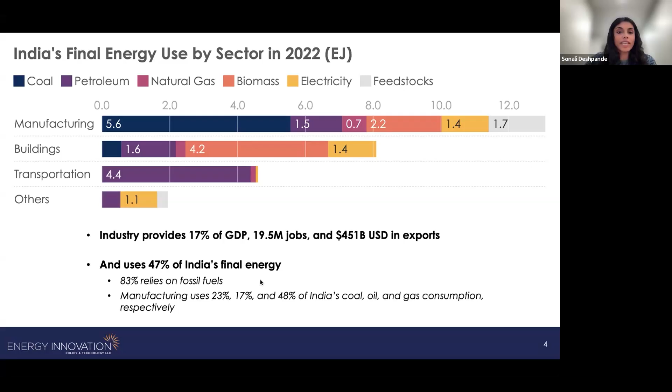The challenge is that fossil fuels don't just emit greenhouse gases, but also local air pollution. And in fact, Indian industry is responsible for more particulate matter and nitrogen oxide emissions than India's entire transportation sector, which is massive.

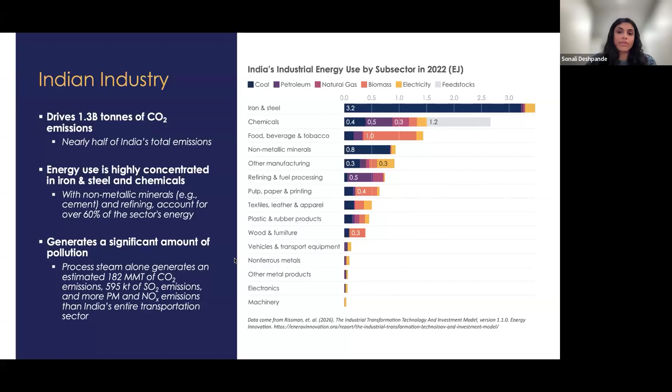So lowering those emissions requires understanding where they come from. Most are from fossil fuels burned for heat and mechanical energy, as you can see in this blue box on the left. Industry also uses fossil fuels as feedstocks, which release CO2 when they're chemically transformed into products or when those products are used or discarded. And then there are also indirect emissions from industry's use of purchased electricity and heat produced offsite using fossil fuels.

So these different emission sources need different solutions. For fossil fuels burned for energy, those processes can be electrified, which is emissions free if it's powered by renewable electricity.

Fossil feedstocks can be replaced with clean feedstocks made from clean hydrogen, sustainable biomass, or recycled materials, and purchased electricity and heat can be replaced by clean electricity.

But since these strategies can be expensive and resource intensive, the highest priority is to first reduce industrial energy demand through energy efficiency, material efficiency, and circular economy strategies. Carbon capture and storage is another industrial decarbonization solution that has a role, but it should be reserved for just a very few specific use cases. Largely, electrification is the solution for industrial emissions.

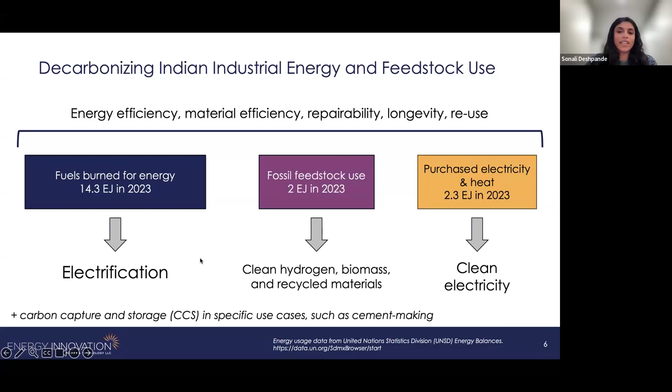So why is industrial decarbonization important for India at all? We touched on this a bit earlier. Indian industry can't keep relying on imported fuels. Those fossil fuels are already very expensive in typical times, and global supply chain issues can send their prices soaring, like we've seen in the last few months with the closure of the Strait of Hormuz during the Iran war.

But industry can't keep relying on coal either, especially in urban industrial zones that are feeding a severe air pollution-driven public health crisis. And importantly, India's reliance on fossil fuels is not compatible with the goal to reach net zero emissions by 2070, especially as industry is rapidly growing to meet the demands of industrialization.

But fortunately, the perfect solution is available to Indian industry: cheap, clean solar power. India has some of the lowest solar prices in the world, with recent auctions clearing at 2.5 rupees per kilowatt hour for standalone solar and 3.6 rupees per kilowatt hour for solar plus battery storage.

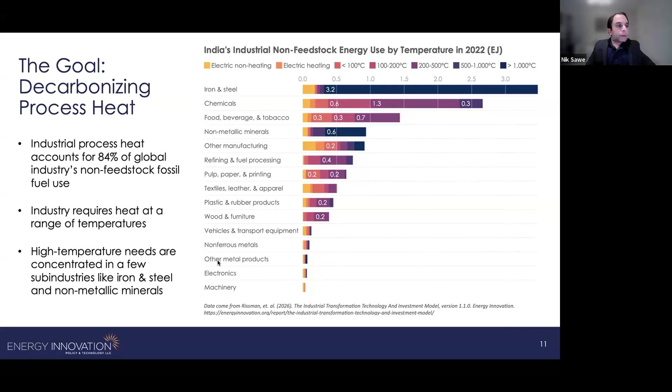Fortunately, we have electric technologies currently that can provide heat across all the temperatures that we use in industry, whether that's induction heating or electric arc furnaces, or as we're going to be hearing a lot more about today, industrial heat pumps at temperatures under 200 Celsius, and then thermal batteries as well that provide storage capacity.

The price proposition for India is also very suitable right now. On-site solar, whether that's paired with storage or not, as well as captive solar, are cheaper than oil and natural gas. And grid electricity as well could be cheaper currently. It has cross subsidies where industrial customers are supporting agricultural and residential customers, but that price would come down considerably if this was not the case.

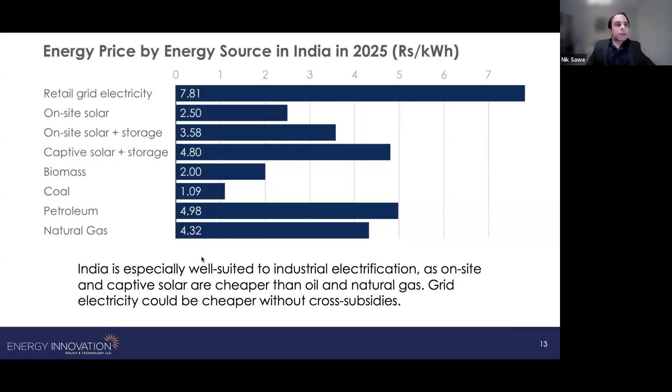We also have to keep in mind, as we're comparing across different energy sources, that fossil fuel efficiency really is not up to snuff compared to electricity and declines with increasing temperature. So energy is lost in exhaust gas as sensible and latent heat. And at high temperatures, this can lead to as little as 21% efficiency. Now, waste heat recovery can reduce that heat loss by one-third to two-thirds, but electrified heating circumvents that entirely as it doesn't produce combustion exhaust gas, avoiding these energy losses and dramatically improving the cost proposition of electrification versus fossil fuels at high temperatures.

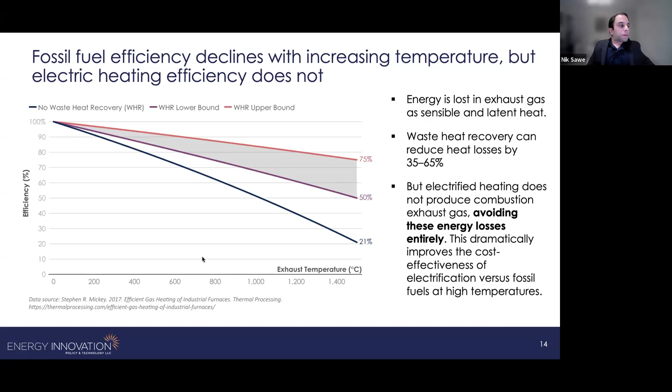So we're going to break down our techno-economic analysis in a moment. What we looked at when modeling different industrial heating configurations included heat pumps and electric resistance boilers and furnaces using 3 different electricity sources: on-site solar and battery storage, captive solar and battery storage, grid electricity, and thermal batteries using on-site solar. These were compared to biomass, coal, petroleum, and natural gas-fired boilers and furnaces.

We broke them down across all the temperature ranges we just saw. We did a levelized cost of heat calculation that included energy costs and capital costs amortized over 26 years with an 11% discount rate, as well as carbon costs of $10 US per ton of CO2 emissions. We adjusted for equipment efficiency as well.

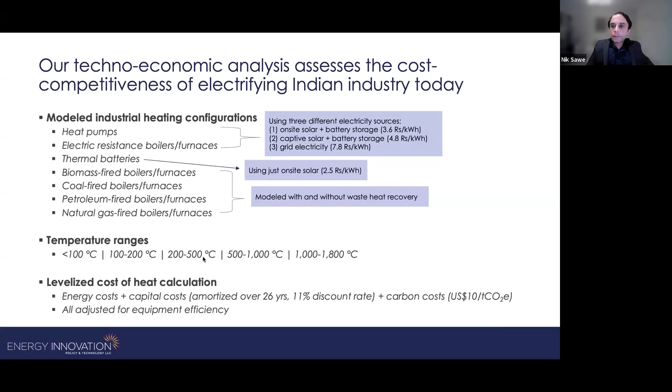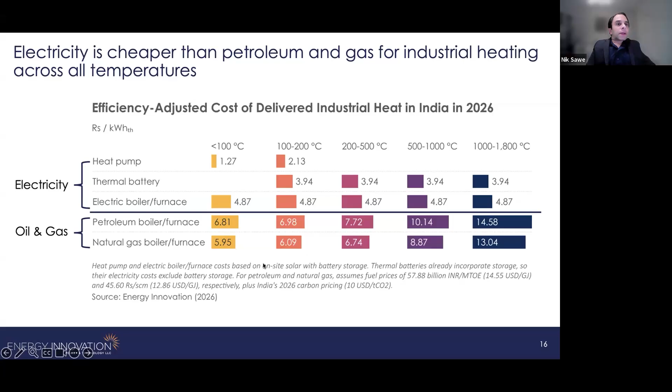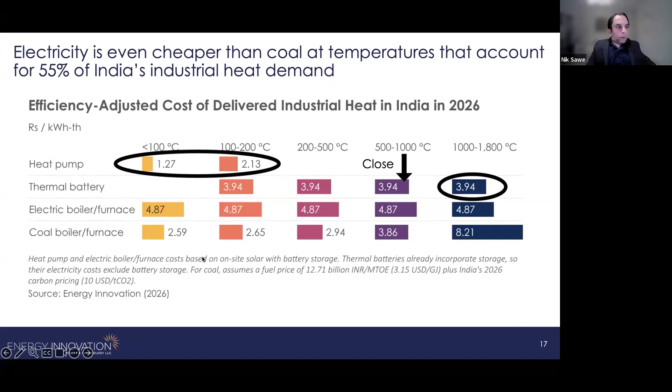We are also very close to cost parity using thermal batteries at 500 Celsius onwards. So really it's that medium temperature, 200 to 500 Celsius window, where coal is still outperforming the electricity options.

That efficiency gain over coal is really at the low end, driven by the unparalleled efficiency of electric heat pumps. They can deliver 3 to 4 times as much heat as the electricity they consume for temperature increases of 30 to 80 Celsius, and they're still the most efficient technology out there when delivering larger temperature increases like 150 Celsius.

At these higher temperatures, fossil fuel efficiency plummets, as we just saw, even with waste heat recovery. In those cases, electric furnaces and thermal batteries still maintain 95+% efficiency and really stand out by comparison.

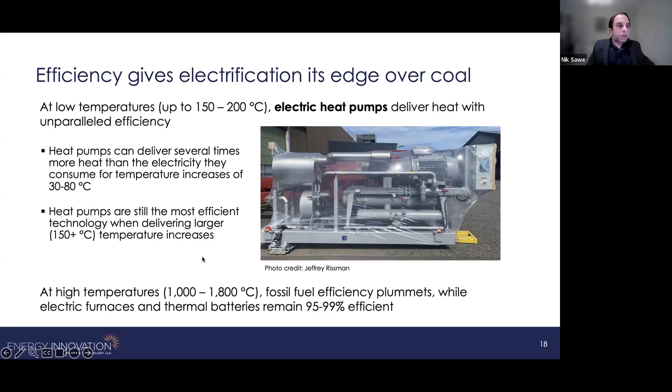Next slide. In India, there have already been pilots of industrial heat pumps up to 140 Celsius. Current models cap out roughly around that. Some models go up to 165 that are a bit harder to get, and newer models coming out support temperatures up to 200 Celsius.

In India, heat pumps have been piloted in places like chocolate and sugar plants, as well as a Gujarat chemical manufacturing plant, where one cut energy usage by 38% and achieved ROI in 18 months.

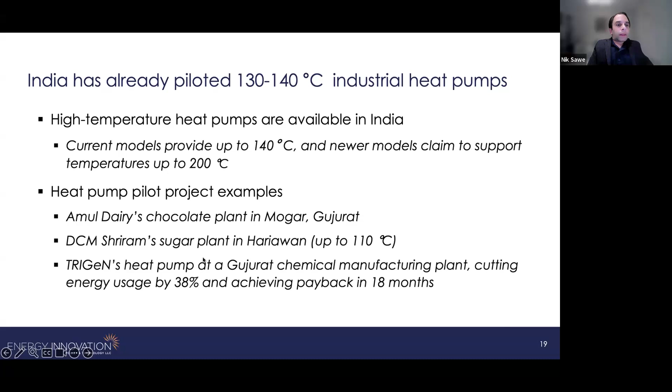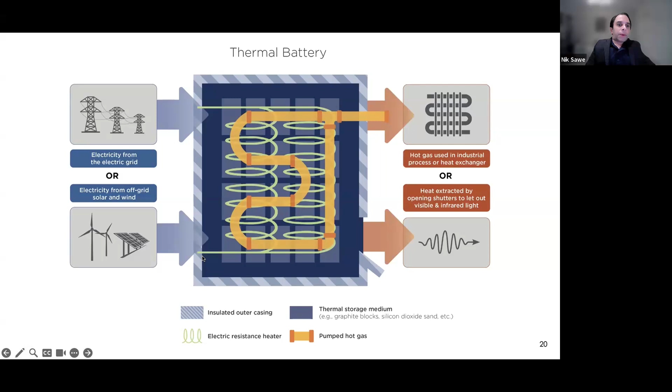Next slide. For those mid and high temperature ranges, thermal batteries essentially work by taking electricity from the grid or from off-grid solar and wind, then running it through an electric resistance heater in a thermal storage medium. Often this is a very inexpensive medium like graphite blocks or bricks. The hot gas is then used in an industrial process or heat exchanger. Less commonly, heat can also be extracted by opening shutters to let out visible and infrared light.

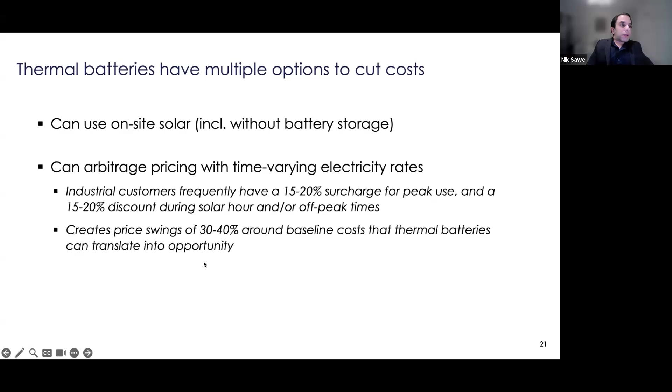Next slide. Thermal batteries have a couple of options to cut costs. They can use on-site solar, including without battery storage, and they can also arbitrage pricing with time-varying electricity rates. Industrial customers in India frequently have a 15 to 20% surcharge for peak use and a 15 to 20% discount during solar hour or off-peak times. So in Uttar Pradesh that's plus minus 15%, and in Delhi that's plus minus 20%. You end up with large price swings around the baseline cost that thermal batteries can translate into an opportunity.

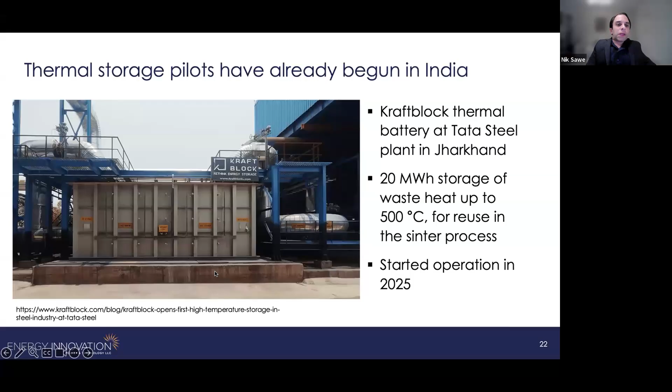Next slide. Thermal storage pilots have already been performed in India at a Tata Steel plant in Jharkhand using Kraftblock's thermal battery—20 megawatt hours of storage for waste heat up to 500 Celsius, reused in the sinter process. That just started operation last year.

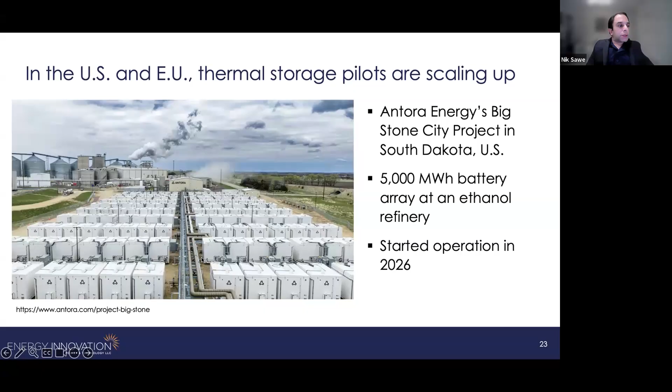Next slide. In the US and EU, they're starting to scale thermal storage pilots. One big example is Antora Energy's project in South Dakota, using a 5,000 megawatt hour battery array at an ethanol refinery, which just started operation this year, 2026.

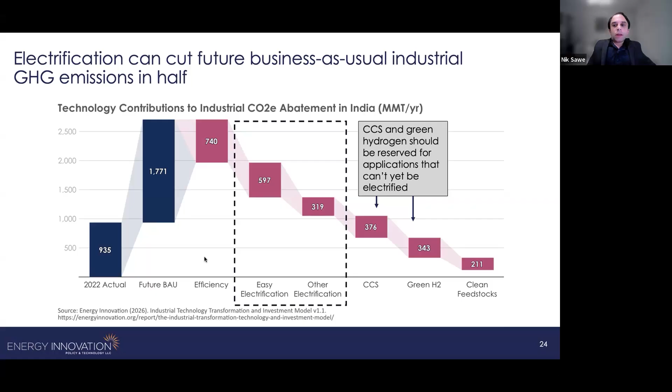And then for CCS, using that for very difficult to abate non-energy CO2, for example, from cement making and certain chemical transformations, as well as bioenergy CO2 from truly low carbon sources, and addressing 90% or more purity CO2 streams from ammonia production, ethanol fermentation, those kinds of applications, as well as the production of blue hydrogen from refinery byproducts or to displace gray hydrogen. Okay, next slide.

And not just CO2 emissions are abated, but electrification really slashes conventional pollutants as well. So renewable-backed technologies, electric technologies really don't produce any conventional air pollution.

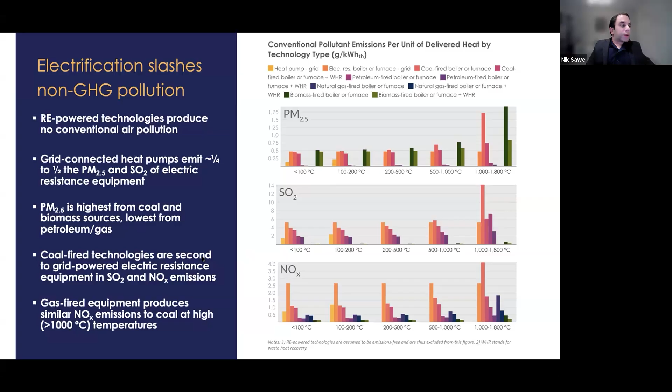But you can see on the right that we're comparing when we say something like heat pump with the grid. These are emissions from that heat pumping plugged into grid with the present day distribution of resources, energy sources. And so even then, grid-connected heat pumps emit a quarter to half of the particulate matter and SO2 of electric resistance equipment. Particulate matter is highest from coal and biomass sources, and then lowest from petroleum and gas. Coal-fired technologies are second to grid-powered electric resistance equipment in sulfur dioxide and NOx emissions. But gas-fired equipment also produces similar NOx emissions to coal at high temperatures, so over 1,000 Celsius.

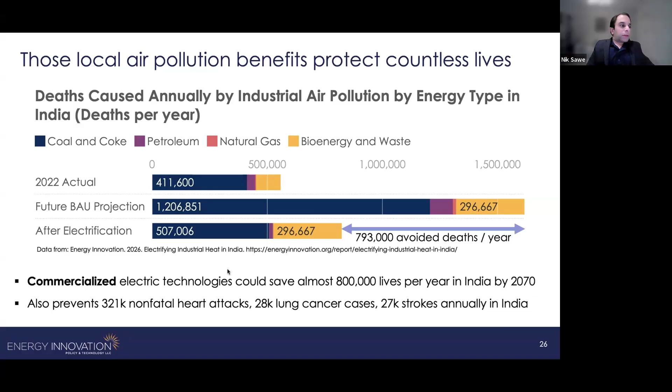Those air pollution benefits that we can get from direct electrification can have a big impact on lives saved. So could be almost 800,000 lives per year in India when we're doing business as usual forecasts rolled out to 2070. Also prevents a number of non-lethal health impacts like heart attacks, lung cancer cases, and strokes. And so really great benefit to the quality of life of everyone around them.

And I'm going to hand it back to Sonali now to talk about policies that we can use to help fuel industrial electrification. Yeah, thanks, Nik.

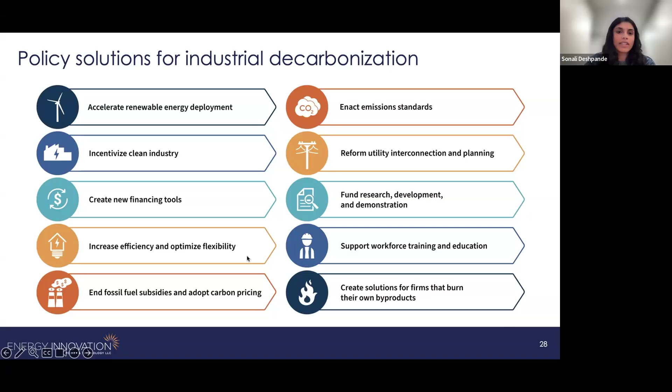So yeah, despite the immense potential benefits of industrial electrification that Nik talked about, industrial electrification lags in all around the world, including in India, and a few key policies can help to kickstart it. This is just a broad overview of the types of policies that we generally recommend to encourage industrial electrification. The point of this slide is to show that it's not really one policy, but a suite of policies that is needed to work together and advance these important solutions.

So, as our analysis showed, cheap solar and storage are largely what make industrial electrification competitive in India today. So, one category of policies that are important for expanding industrial electrification are policies that expand industries' access to solar.

One way that India can do this is by further streamlining their green energy open access rules in a few ways. India can extend the current waiver on transmission charges so that firms can access abundant solar power in other states, expanding the eligibility criteria to more firms, and standardizing state-level provisions as well as charges and settlement periods.

India can also consider industrial electrification in energy system planning, for example, to help co-locate solar or solar parks with electrified industry, which not only expands solar access, but also can reduce cost adders for energy.

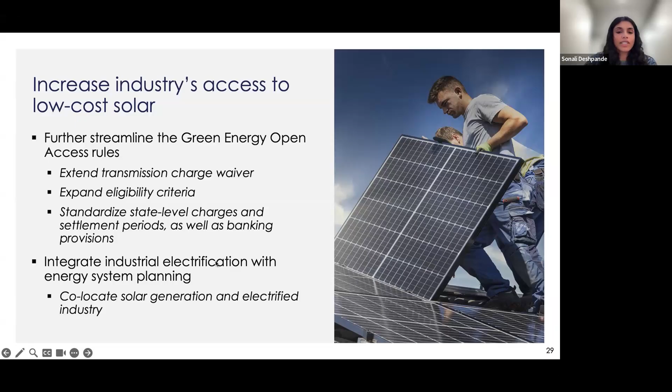Another step to improve the competitiveness of grid-based electrification is to lower the cost of grid power. And this can help firms that face more barriers to directly accessing solar power. The best way to lower grid electricity costs, basically anywhere in the world, is to deploy more clean energy, which produces zero or even negative cost energy at times of day when renewables are abundant.

India can help to site renewables by streamlining the classification of sites and expanding solar parks, and state governments can also get more involved in land acquisition and aggregation for clean energy.

For transmission, advanced conductors and grid enhancing technologies can optimize existing transmission capacity, and India could also leverage coal plants' transmission capacity to use for renewables. And to make more clean energy components available, there are various tools at the government's disposal, like domestic manufacturing incentives and investment in research and development. Beyond all those options, investing in grid-scale battery storage can enable more renewables deployment by balancing its intermittent supply.

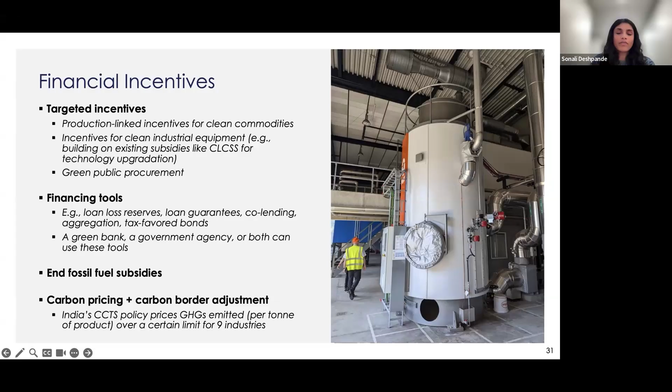And then finally, there are a variety of enabling policies that can address the non-financial barriers to industrial electrification. So for one, India is establishing a cap and trade policy that puts carbon intensity standards on industrial facilities across 9 subsectors. So that is a type of emissions standard in addition to a carbon price. Another type of standard they could introduce is a clean heat obligation, which would require a certain share of a facility's industrial process heat to be zero emissions heat.

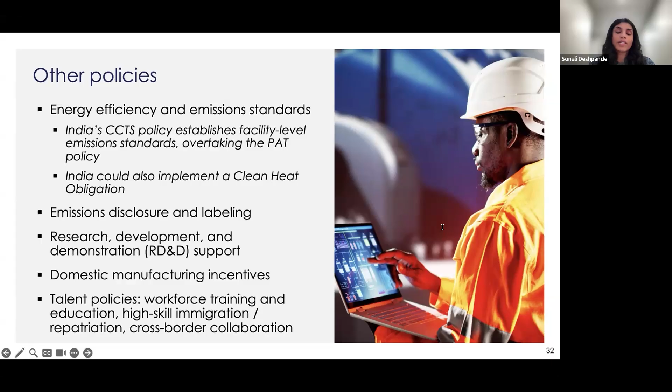Emissions disclosure and labeling can help increase demand for low carbon products. Research and development, as well as demonstration support, can help to commercialize early stage industrial electrification technologies, like for high temperature thermal batteries, for example. Domestic manufacturing incentives can help to make those technologies more available in India, and then talent policies like workforce training and immigration policy can help to bolster the skilled workforce that India needs for industrial electrification.

And finally, I'll just drive home this point that no single policy can advance industrial electrification on its own. It's important to spread the weight of industrial decarbonization across multiple policy types, which each have their own upsides and drawbacks. Relying too much on financial incentives means the government is paying a lot for advancing industrial electrification, and that might just not be feasible from a budgetary perspective. Relying too much on technological advancement, like cost declines through innovation, is risky and uncertain because you don't know what that innovation will yield necessarily and when it will yield that.

And then relying too much on standards and carbon pricing, while those policies are important, if you rely too much on them, then the market can bear too much of the cost of industrial electrification, particularly the capital costs, and those could lead to higher prices for consumers or other challenges.

And that's it. I'll pass it back to Nik now.

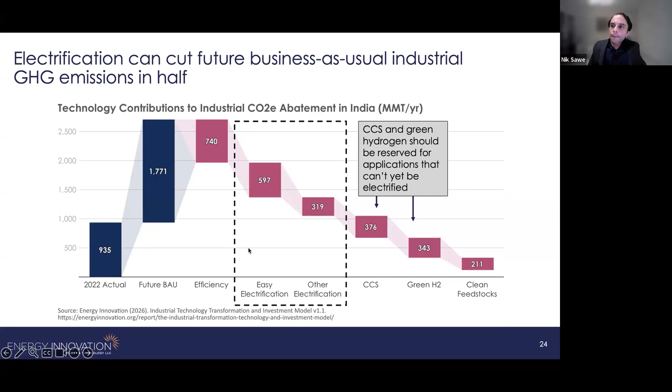What regions or states would have the greatest potential for industrial heat electrification? So I can take that on. Siddharth, it really depends on which end users you're looking at. And given that industries are very well spread out across the country, it's hard to put down one specific state. It would be in clusters, though.

For example, for the textile cluster in Gujarat, and some in Maharashtra, the potential would be very high, especially for heat pumps. There are glass and ceramics clusters, again some in Gujarat, some in Uttar Pradesh, again very high potential. There are pharma clusters and so on. So they're truly spread out — it's hard to put that number. So would you like to add a quick comment to your previous question on this?

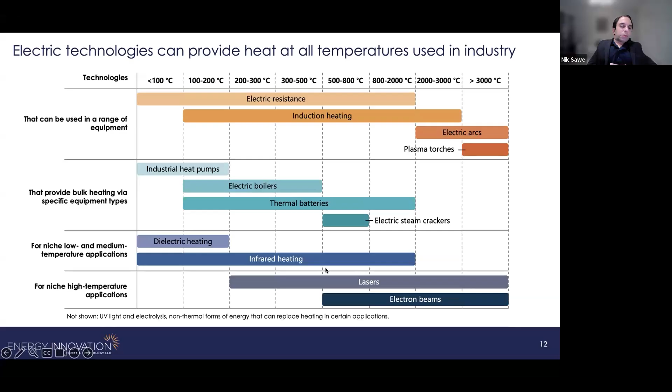It's just that heat pumps have that outsized, sometimes 3 to 4x efficiency over an electric resistance heater at converting electricity into usable process heat. So ideally we make the transition onto heat pumps as much as possible, but there are also options that are less capex intensive while still offering some benefits of clean electricity.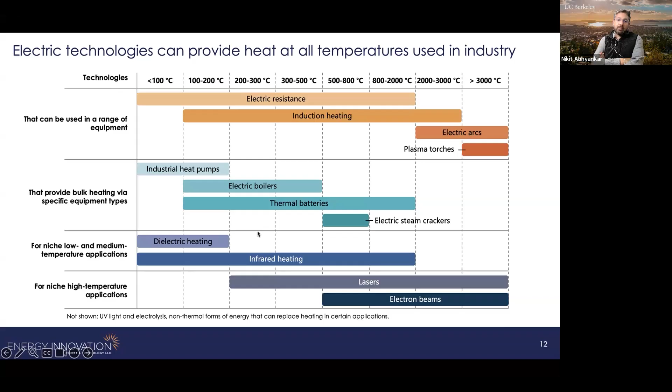I think both questions relate to factory level upgrades that may be needed when you switch from steam-based heating to either electric boilers or heat pump based heating, both in terms of electrical infrastructure as well as piping, plumbing, and other factory level upgrades. So how do those costs compare, and have we considered them in our economic analysis, Sonali and Nick?

Yes, we did account for the capital costs of the electric equipment in our analysis. Generally capital costs of industrial equipment are much lower than operating costs over the lifetime of the equipment—obviously if operating costs are lower, capital costs take up a higher proportion. For heat pumps specifically, capital costs are a higher portion of lifetime cost compared to other equipment, and they can have challenges like larger floor space requirements, whereas electric boilers are more of a one-to-one replacement for combustion boilers.

We did take into account the capital costs, but not the relevant facility upgrade costs, because that data is just harder to find—but it shouldn't make too much of a difference. If you've looked at some of the levelized cost of heat graphs in the report, it shows the breakdown by energy cost, annualized capital cost, and carbon cost, which is very small. You can see that energy cost is generally making up the largest portion.

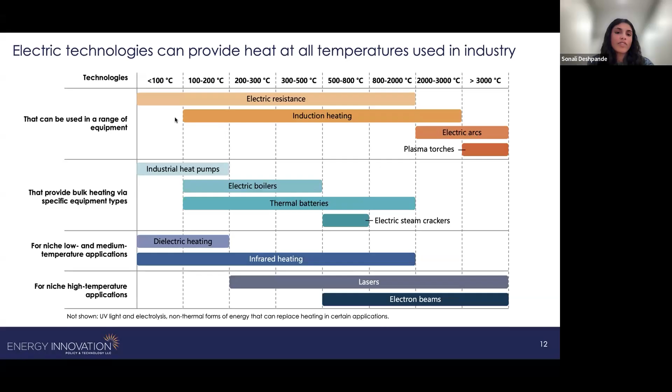Excellent, thanks a lot. We're going to move on, but I think Mahesh and Vinay, the points are well taken—there would be some infrastructure level upgrades needed, specific to industries and end users. That's the next frontier of the research, actually assessing those specific upgrades needed for specific clusters and end users. But we'll be happy to have follow-up conversations with you on that topic.

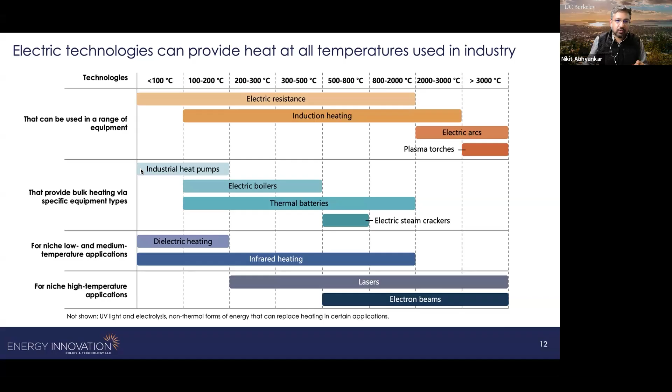The next question is from Steve: for the mid-range heat, the best option in our analysis is heat pumps powered by solar plus storage. But there are some new solar thermal technologies that have significantly achieved lower costs, which could be interesting, though we have not considered them in our analysis. Sonali or Nick, have you looked at solar thermal based heating elsewhere, and what are your thoughts?

I have not particularly. Our colleague and co-author on the report, Jeff Rissman, wrote a book called Zero Carbon Industry, which covers a lot of industrial decarbonization technologies, and he covers solar thermal a little bit in his book, but it's generally not a technology that we prioritize.

Steve, we would be more than happy to receive any material you might have and to look at this. Okay, moving on—I think Aditya, we already took one of your questions, so I'm going to move on to Charulata: how easy is it to transition to industrial electrification from existing systems, and can you comment on the initial investments? I think we have partly answered this, Charulata, so I'm going to move on in the interest of time.